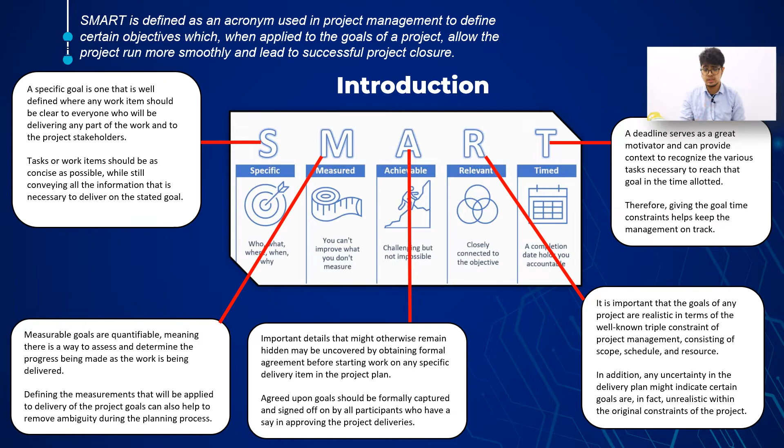There's a challenge for the project managers as they should schedule payments to vendors and suppliers. Additional measurement and designing of better layout could also prolong the process compared to the length of the conventional building process.

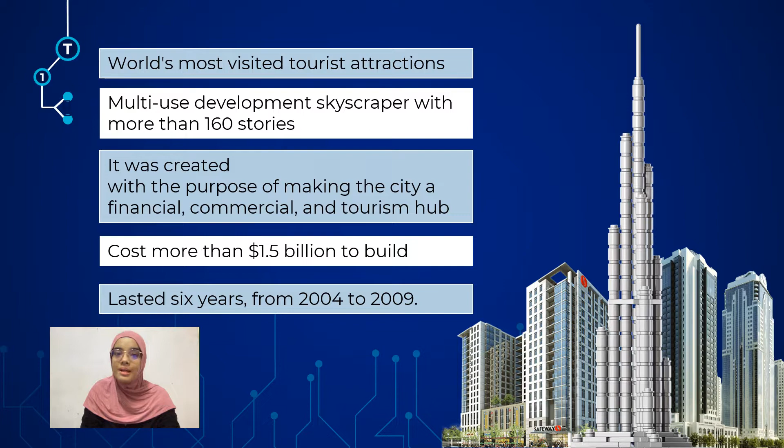It was created by the Dubai government with the purpose of making the city a financial, commercial and tourist hub. The Burj Khalifa skyscraper, which cost more than 1.5 billion to build, stands at over 800 meters above ground level, making it the world's tallest structure and the largest installation of an aluminium and glass facade. The project was supposed to be the showpiece of the gigantic Burj Khalifa development, which would reach an unparalleled height in the sky, and it lasted 6 years from 2004 to 2009.

Now we will look at the type of the project. The Burj Khalifa skyscraper, formerly known as the Burj Dubai, is the world's tallest man-made structure, located in the heart of Dubai, which rose to a record height of 828 meters.

The Burj Khalifa design incorporates local cultural influence with cutting-edge technology to ensure outstanding performance in a harsh desert climate. The Y-shaped floor plans with view of the Arabian Gulf are maximized to reduce wind force while enhancing constructability at the same time. Each wing is supported by hexagon hubs, a 6-side central core with its own high-performance concrete core and surrounding columns.

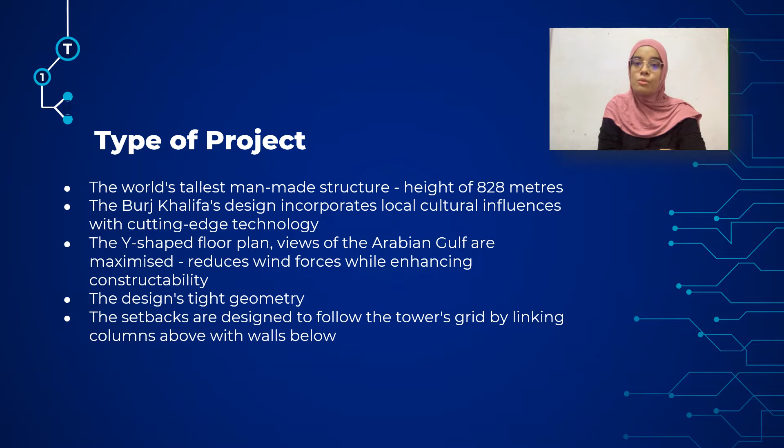The design's tight geometry ensures that all the shell, center core, and column parts are aligned. The setbacks are designed to follow the tower's grid, and stepping is accomplished by linking column above with wall below to produce a smooth load path. As a result, construction could continue without the normal delay caused by the column transfers.

Next is the size. The building was originally known as the Burj Dubai before being renamed the Burj Khalifa in 2010. It is a skyscraper in Dubai, United Arab Emirates, with a total height of 828 meters, and the site area is 104,210 square meters, and the number of stories is 162.

The building gross area is 454,249 square meters.

We will look at the nature. The Burj Khalifa, in addition to its world record-breaking height, incorporates integrative mechanical, electrical, and plumbing (MEP) solutions that make the skyscraper highly efficient while reducing environmental impact and waste. The main goal was to provide comfort and a healthy interior environment.

The team designed a lifeboat vertical transit system with improved monitoring and control to allow for a quick egress in the case of an emergency. The office pavilion has a backup system that can perform crucial duties including water supplies and drainage in the event of power loss. Thus, the Burj Khalifa was intended to combat the wind, which becomes increasingly important as altitude increases.

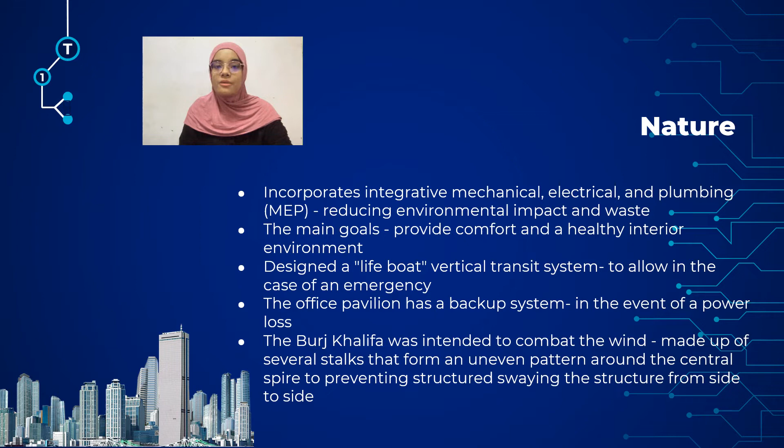The construction is made up of several stalks that form an uneven pattern around the center spire as they climb to the sky. This unique design deflects wind around the tower, preventing structural whirlpools of air currents, or vortices, from swaying the structure from side to side, potentially destroying it.

The last one, we will look at the smart goal. The most advanced technology in wind engineering, structure systems, building materials, and process were employed to construct the skyscraper. The materials were tested in a wind tunnel at hurricane speed of 200 km per hour to guarantee that they can withstand any conditions.

The world's tallest building, Burj Khalifa, used a variety of smart building and Internet of Things (IoT) technology to improve air quality, thermal comfort, and light level for its residents.

The Burj Khalifa team collaborated with Honeywell Building Solutions to put Honeywell Outcome-Based Service (OBS) technology to the test across the mechanical component of the HVAC system.

The OBS software as a service solution captures real-time field data, transfers it to the Honeywell Sentience IoT platform, detects, analyzes, and runs smart algorithms to predict and preemptively manage the building's mechanical system.

At the center of OBS is Honeywell Sentience, a cloud-based IoT platform that provides safe big data capabilities for all Honeywell connected solutions. The technology allows facilities managers at the Burj Khalifa to use building data analysis for predictive maintenance.

The Burj Khalifa also uses Honeywell EBI technology, which provides a single view of building technology systems and improves the connectivity of smart devices to improve efficiency, performance, and operational control.

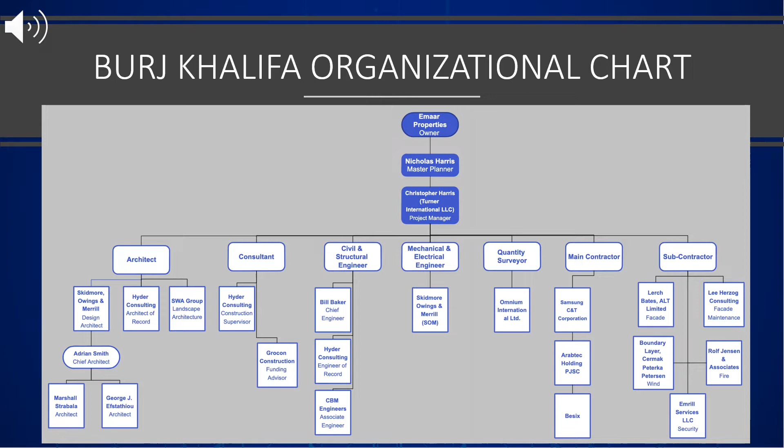As we can see, this is the organizational chart of the project management team of Burj Khalifa. It consists of several expertise led by the owner, master planner, followed by project manager and other professionals such as architect, consultant, engineer, quantity surveyor, and lastly, contractors.

Next, I will also explain about the roles of each expertise in the organizational chart.

Firstly is the owner. The owner of this project is Emaar Properties. The owner needs to provide funding for the project and must make sure the financial source for the project is adequate so that the project will be completed in time.

The next role of the owner is to make decisions for the project, because good decision making at the level of top management is the key to the project's success. The owner is also responsible for selecting the employees who will be involved in the project, such as architects, engineers, and contractors.

Next is the master planner. They are in charge of suggesting budget allocation of the construction project in order to avoid any issues regarding the financial aspects, and the budget will still be in control.

They also need to provide team members, clients, and stakeholders with the progress reports and forecasts to ensure the project is on schedule. The next one is engaging with surveyors, engineers, and architects, which is one of the master planner's roles.

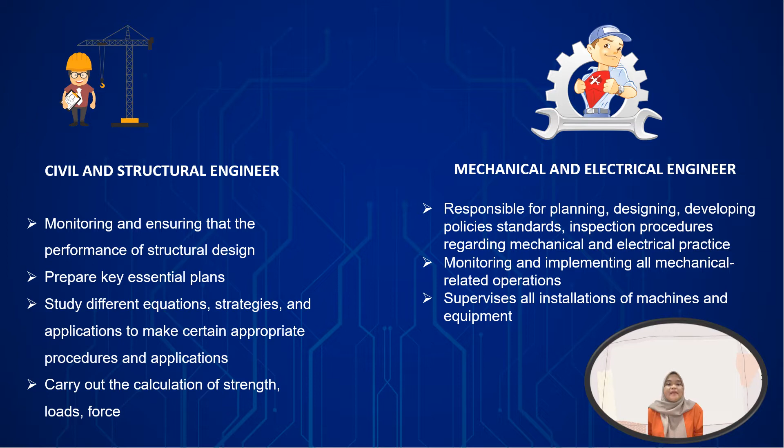As a continuation, the role of quantity surveyor is to prepare a detailed cost plan for every aspect of the project. Another core function of quantity surveyors is to value the completed works and arrange for payments. They are also responsible for advising on legal and contractual issues or project administration.

Before the last point, let's look at the roles of main contractor. The roles and duties carried out by the main contractor include coordinating all construction project tasks, managing personnel on site, and planning how the construction will be carried out from the start of the project until the end, in accordance with all laws, rules, and regulations. The main contractor monitors and evaluates the construction project to achieve the mission and vision of the project as required by the owner. The main contractor is also responsible for hiring specialist subcontractors, having the capability to select the best and most skilled subcontractors or workers, and is more knowledgeable about the labor force employed in the construction industry.

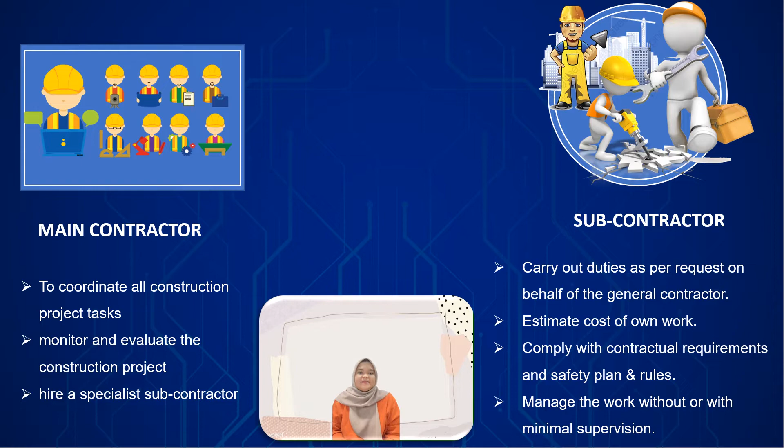The project management practice consists of 5 phases: initiation, planning, execution, controlling, and closing.

First of all, the initiation phase. The development of Burj Khalifa was decided by Sheikh Mohammed, the President of Dubai, to construct the structure of the project, designed to accommodate a range of commercial, residential, and hospitality business. The project was located at Sheikh Mohammed bin Rashid Boulevard, Dubai, United Arab Emirates, with a high-level budget of $876 million, estimated to take 57 months, starting in 2004 until 2008, and it was completed in the final phase in 2009. According to the Skyscraper Center, the stakeholders were authorized to appoint the best professionals to carry out this big project, to avoid any risk or problem arising.

The project organization of Burj Khalifa consists of developer Emaar Properties, design architect and engineer from Skidmore, Owings and Merrill LLP, project manager from Turner International LLC, consultant engineer from Hyder Consulting, and general contractors from Samsung Engineering Korea, Besix Belgium, and Arabtec Dubai.

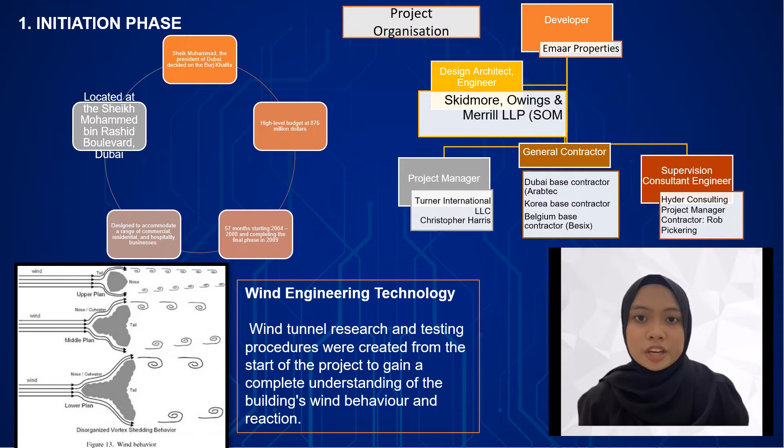Before carrying out the construction work, the appointed professionals concerned about the design decided to adopt wind engineering. Wind forces and consequent motion at the top floor of the Burj Khalifa became an important consideration in structural design. The odd shape deflects the winds around the structure, preventing a structural whirlpool of air current. Wind tunnel research and testing procedures were created from the start of the project to gain a complete understanding of the building's wind behavior and reaction.

The second phase is the planning phase. In this phase, it was time to hand over the project to the developer, Emaar Properties, to carry on the duties as planned. The scope of the project became very high after a problem occurred with the cost, which exceeded the actual planning budget in the initial phase, from $876 million to $1.5 billion. This was to make Burj Khalifa a Dubai benchmark known to the world.

It is necessary to bring the proper process onward to attain the several goals planned in the initial phase. Besides that, geotechnical technology was used in this phase to investigate and test the condition of the soil within 6 months, with foundation construction taking another year and a half. The deep foundation was designed at 3.7 meters thick with 192 bored piles, which challenged the labor and professionals due to the weak soil and the heavy load the structure's size may cause on the foundation.

The aim of this design is to align with the stakeholders' objectives, also to balance the building weight across a larger volume of soil and reduce the load in any particular area.

In the budget detail, the range of labor cost could be 500 to 1,500 UAE dirham per month, contributing to the budget proposed by the stakeholders. However, the detailed budget did not align with the plan. It exceeded the original $876 million, reaching approximately $1.5 billion, due to the worldwide economic downturn in 2008, which resulted in a considerable increase in raw material costs. For example, iron prices increased by 75% in a year.

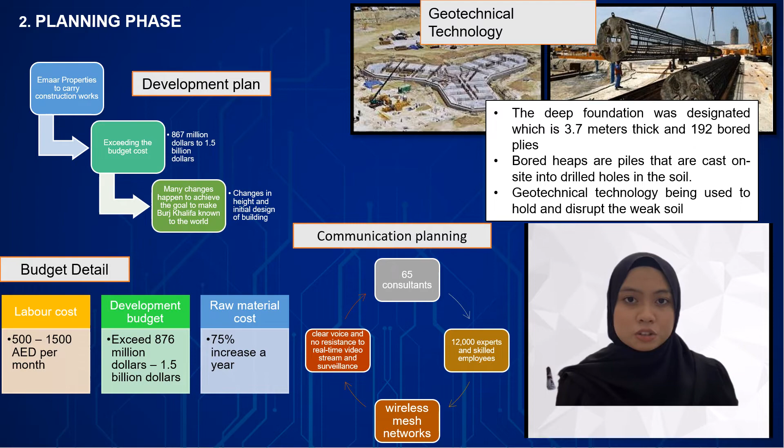The issue with the communication system became apparent after the building reached 30 stories. The walkie-talkie got less and less dependable as the tower grew, causing delays and safety concerns. However, Samsung found a solution by bringing in a wireless mesh network to have clear voice communication with other labor, with no resistance to real-time video stream and surveillance. This wireless mesh solved a crucial communication issue, allowing construction to proceed securely and on schedule.

Next is risk analysis. The goal of risk analysis is to reduce the chance of unfavorable project consequences, and the first step is to determine the cost of impact. In skyscrapers, a new vital component is taken into account: evacuation. It poses several difficulties and requires a proper system of evacuation with refuge spaces that can withstand fire and heat for up to 2 hours. Air pumps are also available in these rooms.

Several risks of the Burj Khalifa development project were identified in the design and construction stages. For the schedule detail, the project activity was done as planned. The Gantt chart technique showed they built 10 floors a month, taking 2,192 days to complete the project. Various issues arose during development, causing the project to finish 9 months later in September 2009.

Furthermore, planning procurement was the next major component for turning the vision into reality, involving close and early involvement with government authorities, utility corporations, and other key stakeholders. The companies listed collaborated and worked closely with Emaar Properties to supply necessary materials and services for the Burj Khalifa project.

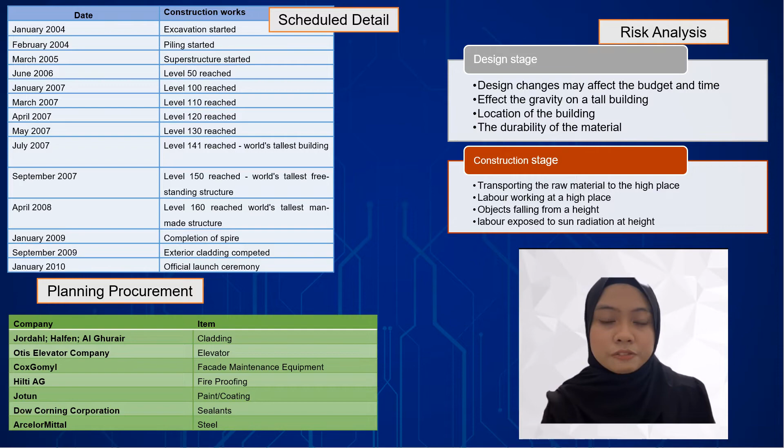The next phase is the execution phase. Quality management was adopted in the execution phase to maintain quality in all aspects of project development, performing quality activities to meet requirements using available resources. To achieve quality goals, Burj Khalifa management employed a project quality plan, inspection test plan, and checklist. Daily operations were managed using a project management information system, which allowed for real-time changes and information access from anywhere.

For contract administration, the contract signed between Armani Hotel and Emaar Properties slightly changed the initial design of the building. The goal was for Emaar Properties to collaborate with Armani Hotel to establish a luxurious space within Burj Khalifa with high-quality facilities provided.

Stakeholders management. A stakeholder is known as an individual who has interest in something, especially in business. The development of Burj Khalifa had involved at least 156 stakeholders, including 78 companies, 16 consultants, 14 contractors, 3 financial institutions, 2 owners, 2 real estate companies, 3 subcontractors, and 38 suppliers.

External wall technology is used in this phase to maintain the quality of the building and to avoid intense heat temperature, and to prevent any risk factor that may endanger the client. For the Burj Khalifa, special 2-pane windows were installed. The exterior face reflects daily solar heat and is protected from ultraviolet rays by a thin coating of metal. Infrared radiation renders the first pane ineffective once more, so to keep infrared rays out, the inner pane is coated with a tiny coating of silver.

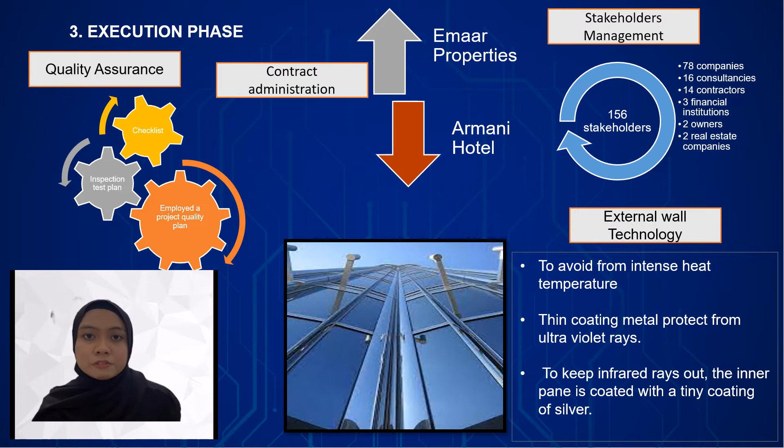After that, the monitoring and controlling phase. In this phase, the first item is quality control. The project quality control methods are created in accordance with the project specification before the project deliverable, and it was designed and formally presented to the consultant for approval, after which they are distributed to all elements of the project.

There was a list of 3 phases in the quality control program of Burj Khalifa development. Firstly, the engineering phase. The 280,000 square meter Burj Khalifa building houses a Giorgio Armani hotel as well as office, residential, and retail space. The tower is made up of 3 parts grouped around a central buttress core, made of reinforced concrete and glass.

To decrease wind pressure and improve constructability, SOM devised to adopt wall and floor technology, which is a basic Y-shaped layout. Besides that, administration and implementation: implementing the building's tools and procedures necessitated the ability to move massive amounts of steel and concrete higher into the air as the structure got taller. Dealing with the weather fluctuation might make the construction process more difficult.

Next is performance measurement and measuring phase. Effort from a representative sample of the workforce. If there is any occurrence or accident, they must be investigated and remedial action performed. Violators should be investigated and disciplinary action imposed. All project departments should incorporate performance measurement and evaluation.

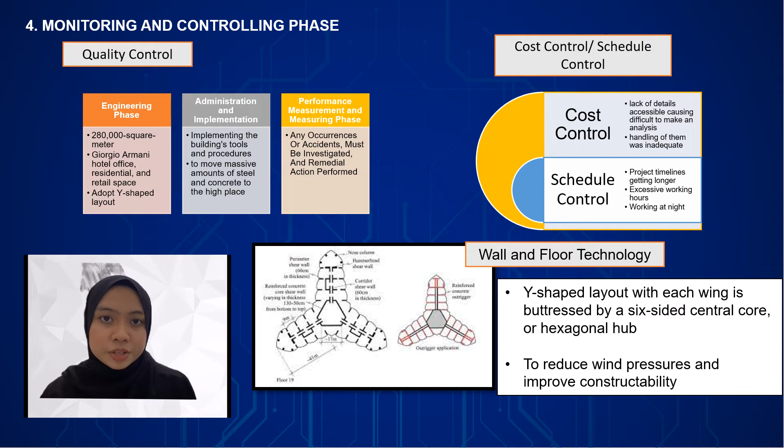The last phase is the closure phase. The Burj Khalifa was completed in January 2010. 10,000 fireworks were let off during the launch ceremony. A light beam was projected on and surrounding the tower, along with music, light and water effects. Hundreds of media organizations from all around the world broadcast live from the site, and in addition to the media, nearly 6,000 people were out to witness the start of this historic event.

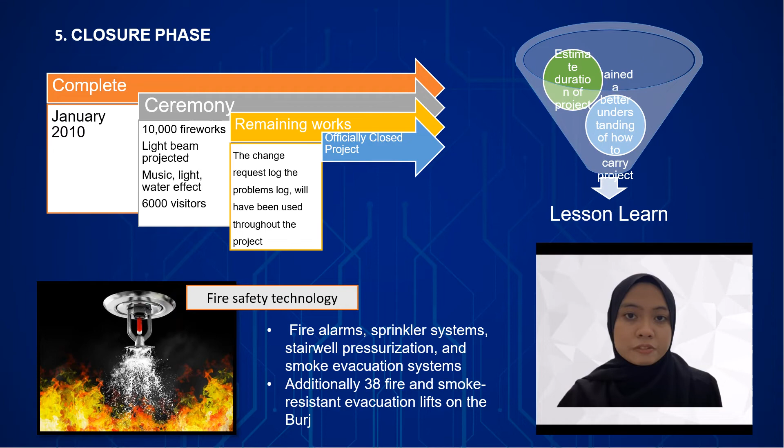The lesson learned from the development of the Burj Khalifa is that members of the project organization will have gained a better understanding of how to carry out this sort of project in the future, as well as an estimate of how long different activities on this type of project will take to complete. The primary technology used at the Burj Khalifa after the completion of the project is fire safety technology, consisting of fire alarm, sprinkler system, stair pressurization, and smoke evacuation system. There are additionally 38 fire and smoke-resistant evacuation lifts in the Burj Khalifa.

Next, we move to the challenges faced within the project management cycle. The challenges are divided into two categories: structure and construction.

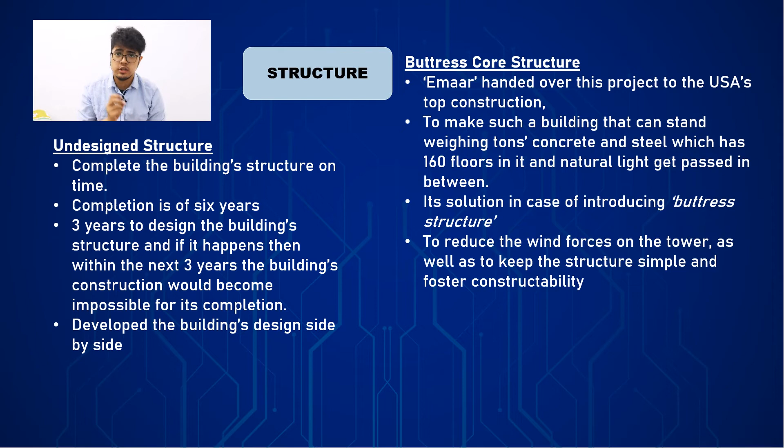Under structure, there's an undesigned structure, which is the challenge faced by the workers where they had to complete this building structure on time. The time given for its completion is about 6 years, but the engineers need 3 years to design the building structure, and if it happens then within the next 3 years, the building's construction will become impossible for completion. Therefore, the engineering team decided to start work and develop the building's design side by side.

The next one is buttress core structure. For Burj Khalifa construction, the management team Emaar handed over this project to a top construction company from the USA, located in Chicago. The company had already designed many other buildings very well, but this time they faced some hardships. Their challenge was to make a building that can stand with tons of concrete and steel, having about 160 floors, while letting natural light pass between.

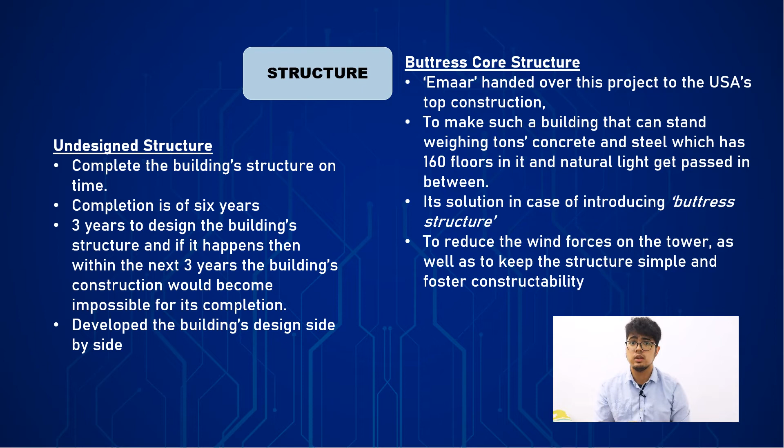After efforts of day and night, the firm finally found a solution by introducing the buttress structure. According to William Baker, the spiraling Y-shaped plan was utilized to shape the structural concrete of Burj Dubai, to reduce the wind forces on the tower, as well as to keep the structure simple and foster constructability.

The next category is construction, where the present soil was not appropriate for a skyscraper. When the time came to place the building, a problem arose: for situating the tallest building, engineers needed solid huge rocks placed below. The construction area had acute weak rocks, and the soil present below was not appropriate to withstand a skyscraper building. To overcome this challenge, engineers applied a simple formula of friction, deciding to stand the building structure on 192 equally distributed solid steel piles dug 50 meters underground to maintain the building's weight and base.

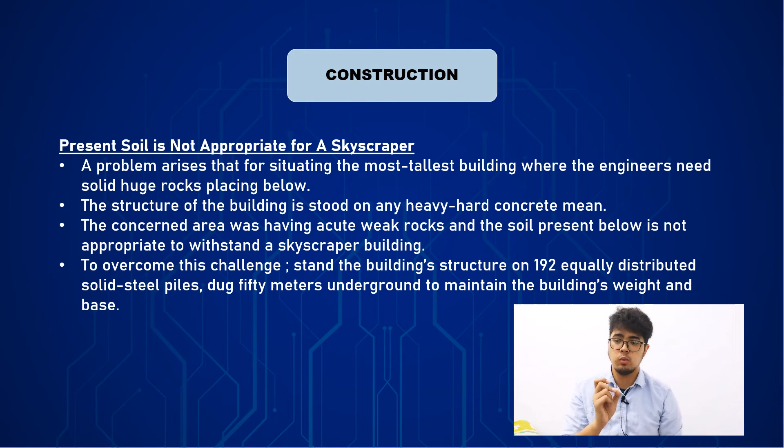Next is the concrete suction system. By then they had made many floors, but faced another problem: when workers had to take the concrete mixture to the upper floors for construction, the concrete would dry due to summer heat. So the team decided to use a concrete suction system, installing 3 thick powerful pipes from bottom to top which could place concrete mixture at any floor, handling weight more than one lakh elephants. Through this system, the concrete mixture remains in liquid form and can easily be pumped, but it was done at night time by the workers when the heat was lesser.

Next is crane operators. Here the team faced a new challenge: the cranes used at the construction site had the capacity to lift material only up to the 120th floor, and the crane operators who operate these machines refused to work above this height. To overcome this, the HR department hired a bulk of crane operators from all over the world, all sharing one thing in common - they were not afraid of working at height. These crane operators worked at a height of about 700 meters, spending almost 12 hours working per day.

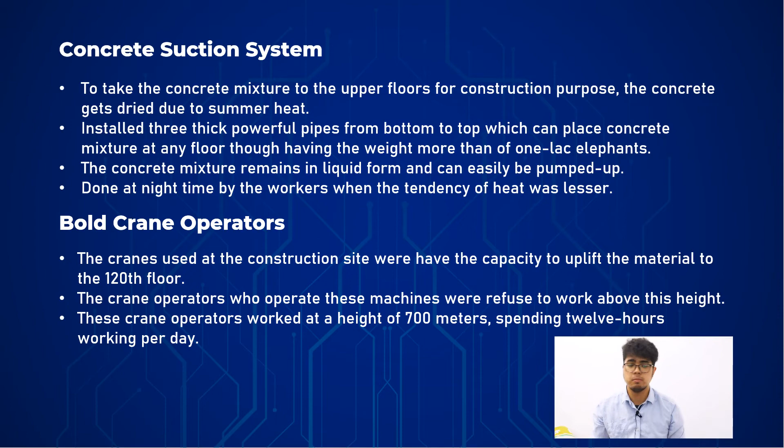The next one is installation of glass panels. There was a need to place about 24,000 glass panels. In this situation, these glass panels became unable to protect the inner side of the building from the sun rays entering from outside. At this stage, the measuring temperature inside was about 100 degrees centigrade. So to keep the building's inside temperature cool, the firm needed to install many strong cooling applications that would utilize 10% more electricity cost overall. To find a solution, 18 months passed.

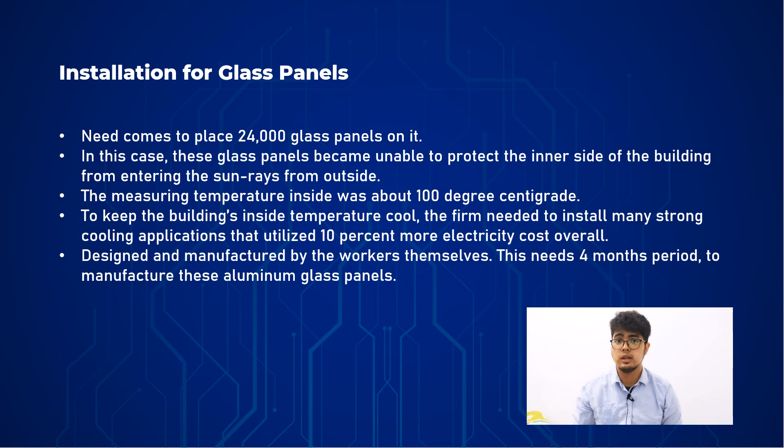The last challenge was the placement of the telescopic spire. In the last year of construction, Burj Khalifa was almost ready to launch. Gas, electricity, and sanitation installation had been done, but still something was missing - the top floors. Construction was uncompleted. A solid steel pipe needed to be installed at the top, about 136 meters long and 350 tons heavy. The problem was that there is no crane in the world that can lift this much weight and reach that height.

So at last, the team decided to install the steel telescopic spire by lifting it in parts, turn by turn, from inside the building towards the upper position. When the parts of the spire reached the top, workers assembled them there, and this way the steel spire got situated in its constant position.

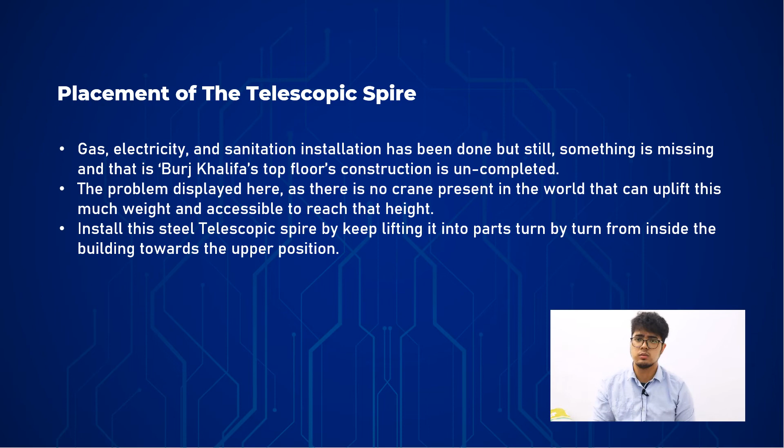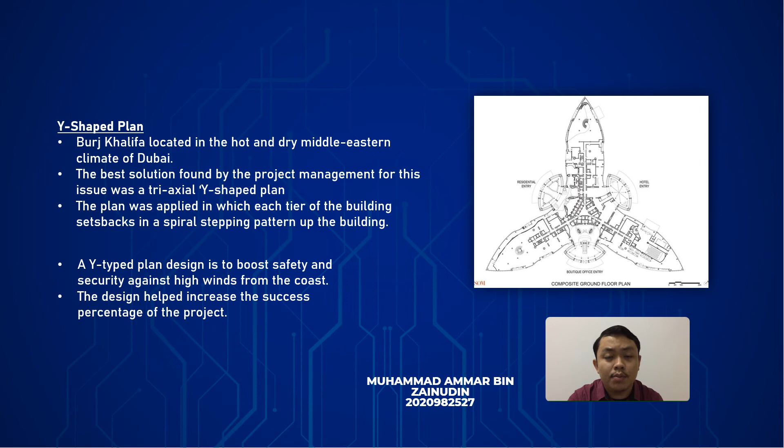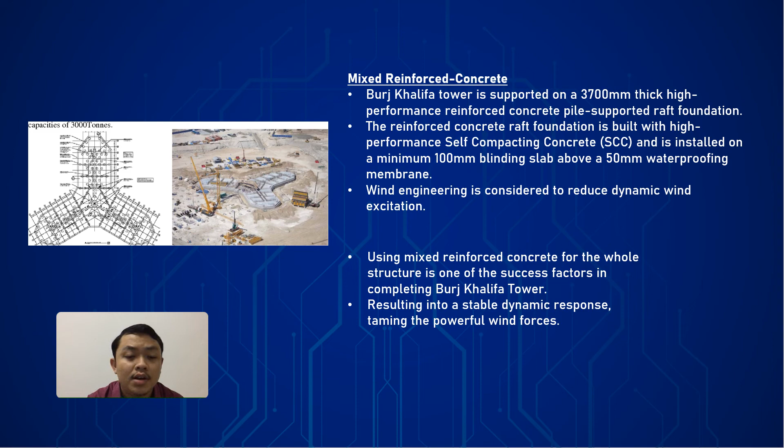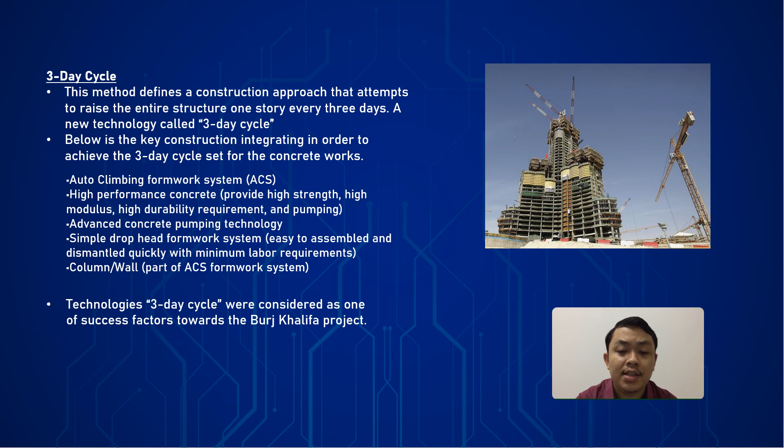The third success factor for the Burj Khalifa project is the 3-day cycle. The development of the Burj Khalifa project, targeted for 160 floors rising to an unprecedented height exceeding 700 meters, required new technology called the 3-day cycle. With the initial plan to complete in 47 months, the schedule was very tight. This method defines a construction approach that attempts to raise the entire structure by one story every 3 days. The key construction integration to achieve this cycle for the concrete works includes the auto climbing formwork system (ACS), high performance concrete, advanced concrete pumping technology, simple drop head formwork system, and column or wall components, which are part of the ACS formwork system. This technology was considered one of the success factors for the project.

The fourth and last success factor shows the management competency of the Burj Khalifa project. The author highlighted that project manager competency is the most important aspect in achieving the set objectives. Having resource management may be one of the most important issues to consider, depending on who is building the construction. For the Burj Khalifa project, the general contractors were Samsung Engineering, a Korea-based contractor, Besix, a Belgium-based contractor, and Arabtec, a Dubai-based contractor. One of the huge impacts from Samsung Engineering was toward communication management.

As said by Chang Gen Lee, the project manager for Samsung Corp, problems with their communication system appeared as the building reached the 30th floor. The walkie-talkies got less and less dependable as the tower grew, causing delay and safety concerns. Ultimately, Samsung Corp devised a wireless mesh network to address this problem, allowing for clear voice connection as well as real-time video broadcast and surveillance. This wireless mesh solved a crucial communication issue, allowing construction to proceed safely and on time.